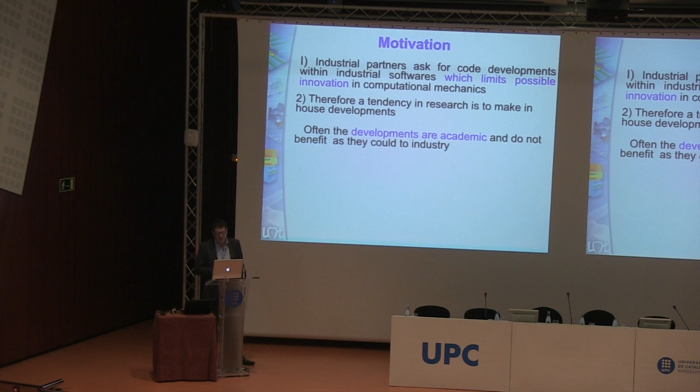So industrial partners often ask us to do code developments within their own softwares. And this limits a lot what is possible to do in computational mechanics for industry today. Not all industry, but let's say classical industry. Therefore, as we like to do research, we have a tendency to develop our own developments. But those developments, even if very interesting, are often academic. We cannot take into account the complexity of real industrial problems and so on. And so they do not benefit industry as they could.

Okay, so the non-intrusive paradigm aims at, in fact, combining the two worlds, aims at doing what we want to do within industrial models. Okay? So the goal is very simple. The goal is to be able, where you need, to substitute a model of a part of an industrial part with the model you think is much better and with the technique you think is much better to solve this model.

Okay, so the idea is to couple a general model with all the technical complexity with, where needed, a local model you think is much better than the other one, with the computational technique that you like, and so on. And the tool, basically, today is quite easy. It's thanks to Python scripts. The price to pay is that the method is iterative.

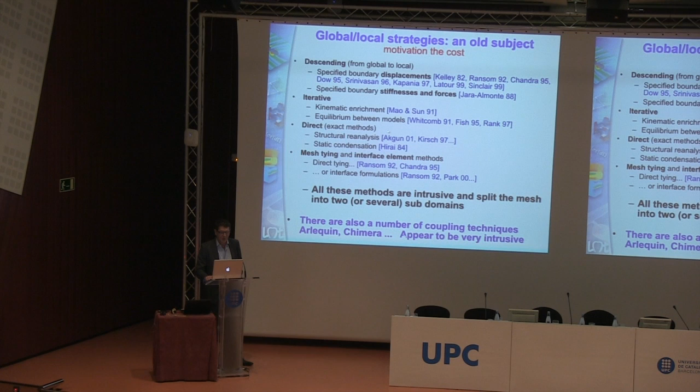So, in fact, as I said, it is an old subject. It comes from what in the past was called local global strategies. So there are a bunch of works which have been interesting in that area. But in fact, what we try to do here is to do global local strategies in an extended way and in a non-intrusive way. So this is something which starts to gain interest in research. The vocabulary comes from stochastic approaches, because to put a stochastic model within a classical code is difficult. So people have tried to do stochastic computation outside of the code. Okay, so that is why I use this vocabulary.

And within those methods, you have local global approaches from Whitcomb, the first, I think, which is weakly intrusive. You have the same goal in the Arlequin framework, but it's strongly intrusive. And today, what I call the method is substitution. You substitute a part of something with another part. Okay, and there are works going on in a variety of domains. I will mention that, besides what I call substitution, there is very interesting work done by Duarte and other people in fluids and in solids with non-intrusive versions of partition of unity methods.

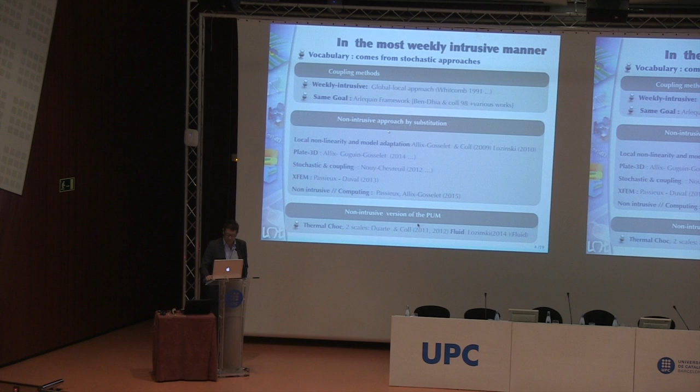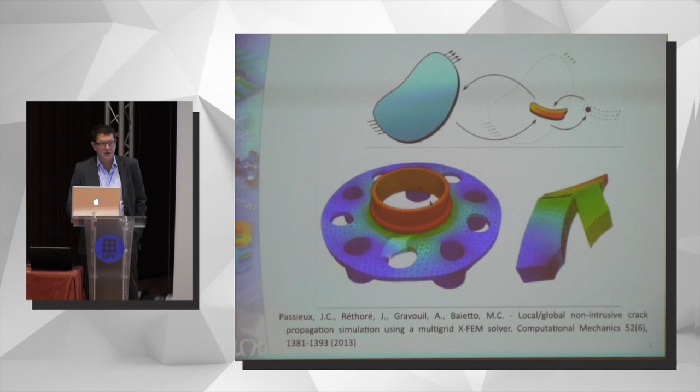Okay, just to see what you can do, it's a very nice work from Passieux in Toulouse. In fact, he has an industrial code where XFEM was not implemented, but the guy wanted to test XFEM. So they had an XFEM solver. So like this, you can substitute this part with this part. And really, what I call non-intrusive is that this thing has been done in an industrial software, and we never touch it. We don't touch the model, we don't touch the mesh, we don't touch anything. We want to replace this by this, doing natural computation on the industrial model. Okay, that is the goal.

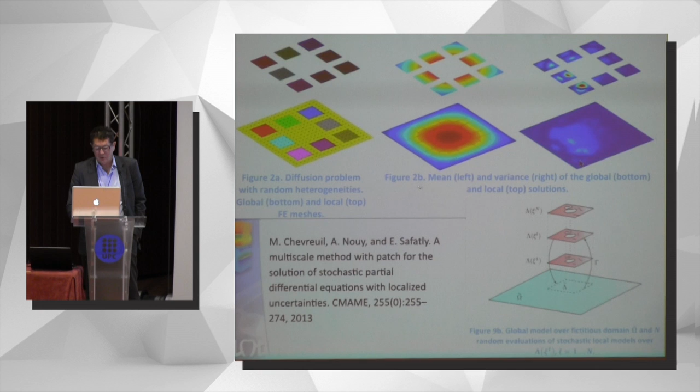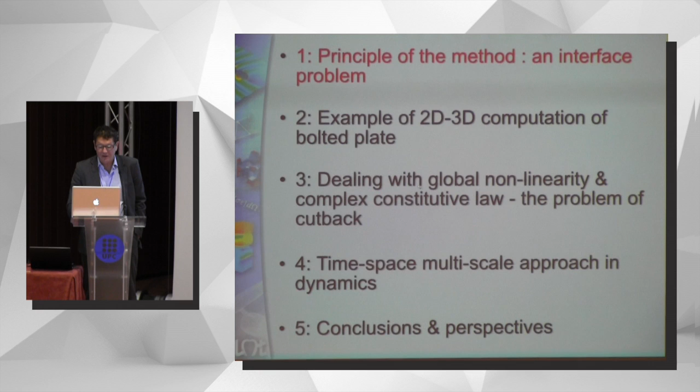So another type of work today is for people who are doing stochastics. In fact, usually you have uncertainty locally, so you can use your favorite global model, and you substitute locally and solve locally the stochastic problem. This is the work done, for example, at Nantes by Nouy and others. So, just to give a flavor of the method, it's very simple. It is an interface problem. So let's take this simple example here.

This is my reference model. It can be nonlinear. You have holes. You can have detail. It is a sketch. Okay. And this is my initial model. It is a linear one, for example. And I have a crude description of the local zone, both on model and on topology.

Okay. So what I want to use is only two models. This model and this model, because this is the local one, and if I want, I can use an iterative solver. I can use what I want to solve this problem. Okay. So the question: how I compute the reference problem thanks to those two problems.

In fact, this one I will call it exact. This one I will call it global. This one I will call it fine. And for technical reason, I will need what I call approximate. That is this area, this model, the crude model of the local zone. Okay, so it's a very simple problem.

In fact, we see that in order to get the correct solution, we should find additional interface forces to compensate for the differences between the crude approximation of the local model and the correct one. So abstractly, we have to find these forces which take into account the differences of the two models, and will give the same displacement at the interface as the reference model and the same reaction forces. So very, very simple model.

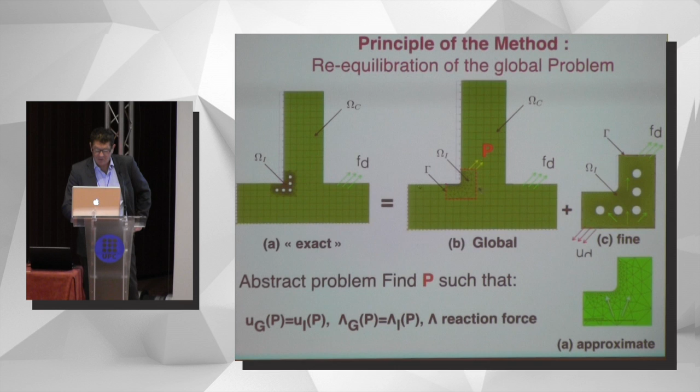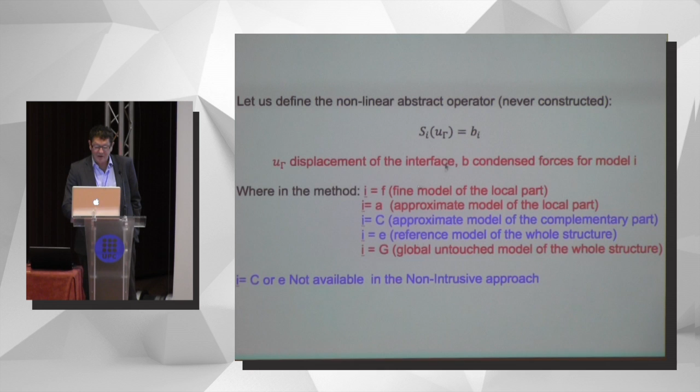Just to give a word, what is this operator? In fact, in the classical linear sense, it is only the condensation of the problem on the interface. Okay, so it's very classical. So you do a classical condensation. Here we do not do that, of course, because the operators are nonlinear. But it is classical.

So from condensation, we know, for example, this is very important, that the exact Schur complement is the sum of the fine plus the complementary part, and that the condensed forces can be seen as a contribution of the fine part and contribution of the complementary part. And these are general properties, true even in nonlinear cases.

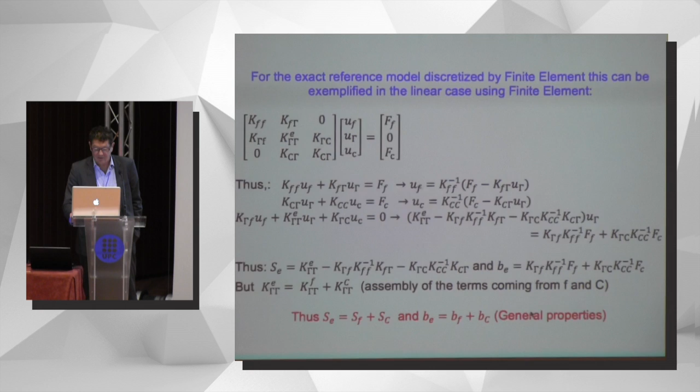Okay? So if I replace this guy in this solution, I end up with this equation. P is the solution of this abstract problem: F of P is equal to 0. So in the algorithm, we'll do a fixed point algorithm. So P solution of F of P equals 0 means that P is a fixed point of these operators.

What are these operators? This operator is identity minus the Schur complement of the exact problem and the inverse Schur complement of the global one. Due to the properties that I said, it is the difference between the global and the exact, which means the difference between the approximate modeling of the local zone and the exact one.

Okay. And due to a classical property of contractive operators, if you have this operator, which is larger in the sense of operators than this one, you converge. Otherwise, you compensate by a relaxation to ensure convergence. So convergence is really not difficult to prove when convergence exists.

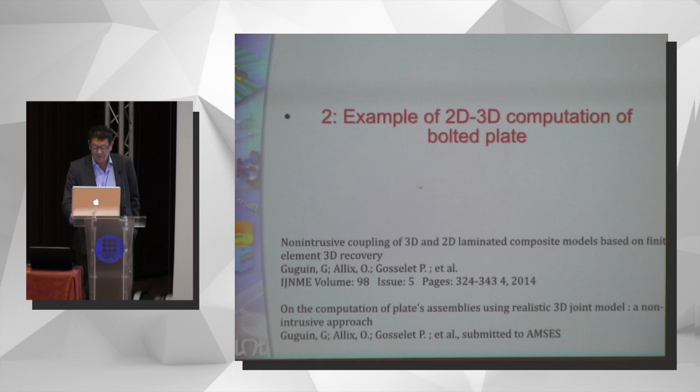Okay, so a very simple iterative algorithm. We compute the global model, we compute the reaction forces, we add this as a new force, and so on, and it converges. Okay, so now some developments. Of course, we can improve the rate of convergence, but the principle is here. So some developments. We have tried to use this scheme. I should give maybe something to solve that type of problem. I will come back to it. So in fact, it is just a scheme.

You know, in industry they usually deal with plate and shell models. But then you have local parts like joints, multiple joints, and so on. And in fact, the joint models in plate models are very crude. So we would like locally to be able to introduce a 3D model of the joint with all the non-linear complexity. Okay, I will come back to it now. So the idea of what we have done is to do the same thing in 2D that we do in 3D. That is, we start from a 2D computation. We associate a 3D solution from the plate solution. We'll see how we do that.

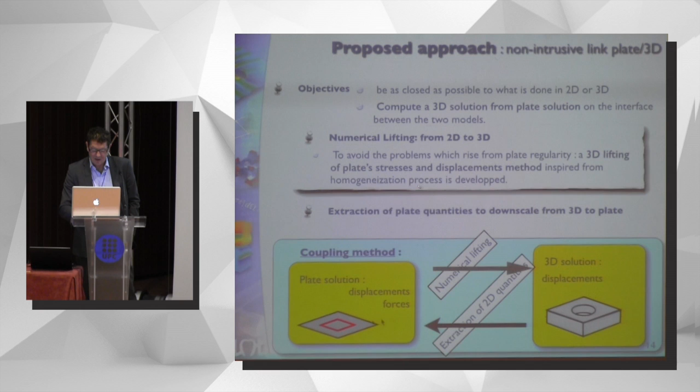So we will try to match only the 3D solution associated to the plate solution with the 3D one of the bolt. Okay. So, in fact, we start from the plate solution, we have displacement and forces, we go from here to the 3D solution, we get the displacement, and we compute now the extraction of the 2D forces, and we compute the residual in the 2D sense.

So how do we compute this numerical lifting of the 2D solution? In fact, we use a kind of homogenization scheme. That is, we solve a small problem for a composite part, for example. We suppose that the plate works in a linear manner. So we decompose the problem into 8 basic problems for the Reissner-Mindlin plates. And due to those 8 basic problems, we compute the stresses and displacement.

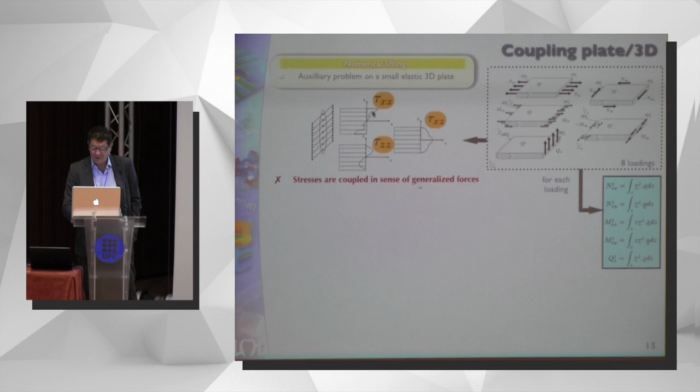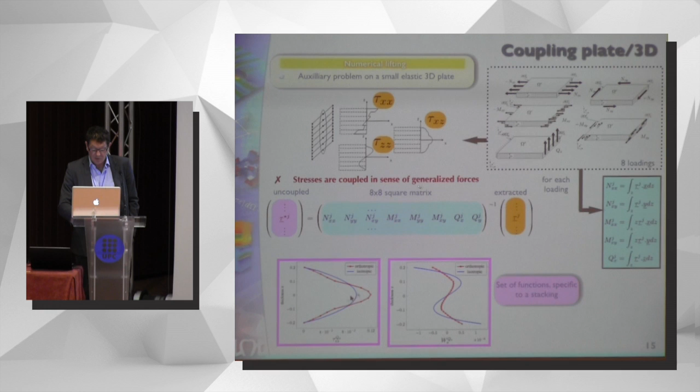And then, for any type of plate loading, we recover the distribution of displacement and the distribution of forces through the thickness, thanks to 8 simple problems. These are pre-computed, and we use them afterwards to lift the 2D solution and to couple the 2D solution to the 3D in the 3D sense.

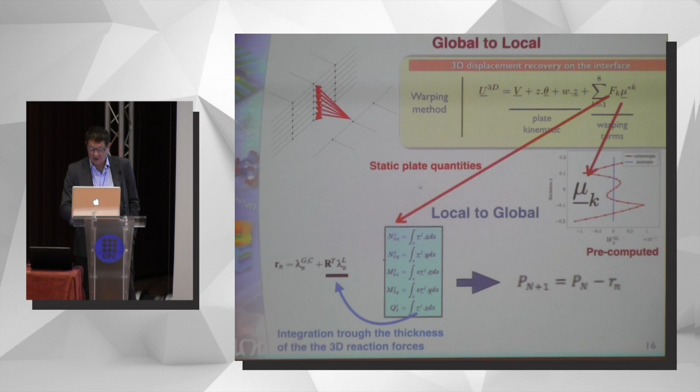Okay, so how is it done? We say that our displacement in 3D will be the plate one plus this warping term multiplied by the corresponding force in the plate solution. This gives us the distribution of the displacement in 3D associated to the plate one. Then, when we have done that, we send it to the local model. We compute the residual force, like before, which is the difference of the 2D one plus the condensation of the 3D reaction forces in the plate sense. This gives us our new forces, and so on.

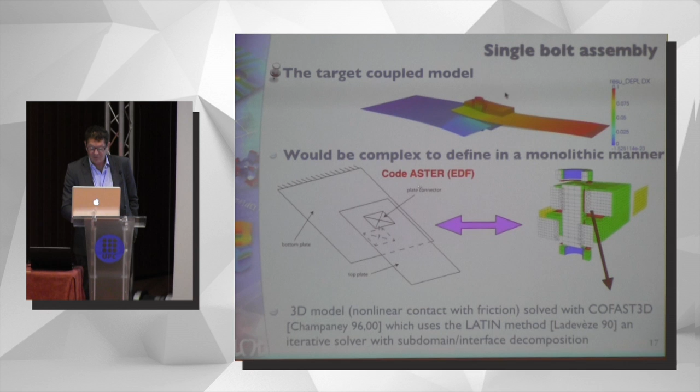So here, what is the interest? So I start with a plate solution. Here I have a very crude model of the junction. But the junction is quite complex. You have a screw, it is bolted, you have friction everywhere. So here you would like to use your favorite software. So in Cachan we have developed a software specialized for that type of thing. That is a screw, taking into account the prestress in the screw, all the surfaces and so on. Okay. So I will compute this problem thanks to this problem which is done in an industrial code, and this one.

Okay. So here it is interesting to see what happens. How does the fine model of the screw play a role? Here you see the plate solution associated to the initial one and the correction in the linear regime. So you see very little correction at the beginning. But then, as soon as you become nonlinear in the screw, here there is an unscrewing of the bolt. You see that there are big differences, even in the global solution, between the plate solution outside of the screw and the one. Okay.

So also this method is interesting because if you stop at the first iteration, in a way, it is what people do in industry, which is what they call the submodeling approach. So we can also check the submodeling approach. For example, the first here is the sliding at this point B here, between the plates, and the sliding within the screw at point A.

Here you see that for the first descent, here we get quite a correct value of the sliding far from the screw, but a very wrong one close to the screw. Okay, so it depends on what phenomena you want to look at. So submodeling is not good if you go, let's say, far in sliding within the screw.

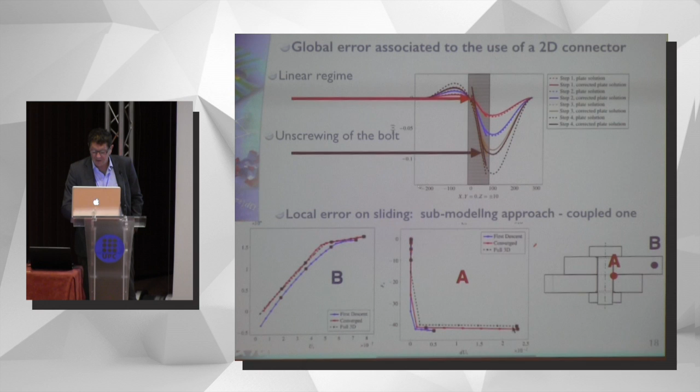And here, this is a full 3D computation. This is the solution obtained for the things. Here, you see that this is a full 3D solution. We were able to perform it. This is a converged solution. This is a non-corrected solution. You see that within the screw, that is a submodeling approach. Within the screw, the submodeling approach is fully wrong. And you can see also, here it's more difficult, that in fact the sliding, the unscrewing of the bolt is not predicted with a submodeling approach.

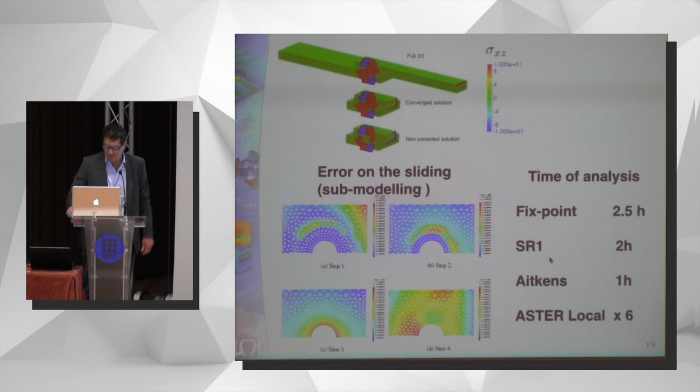So the time of analysis, those problems are complex. You have unscrewing, you have things and so on. So if I take the fixed point, it is 2 hours and a half, let's say it's our reference, we can use acceleration techniques. And the best one is Aitken's. It's very simple, it's non-intrusive, and it works very well. And so in fact, for all this method, if we do the same thing, computing the screw with Aster, it is 6 times. So why? Because we develop a special software which is more for the computation of the joint, which is much more efficient than classical software.

So now what are we dealing with? We're dealing with not one bolt, because it's not interesting, but a series of bolts. And in fact, in that case, the non-intrusive technique can be seen as a preconditioner. The plate solution can be seen as the preconditioner of the 3D ones. And then what is the interest? That for this bolt and this bolt, I can use always the same software, which has been developed only for one bolt, and use it in parallel due to these techniques. So at the moment, we are computing hundreds of bolts with the same software in parallel, using the plate solution in that case as a preconditioner.

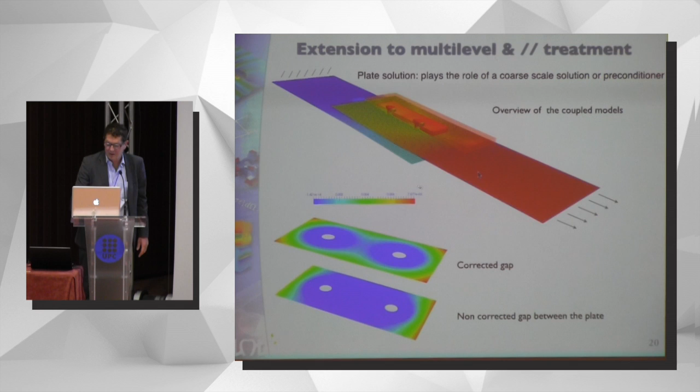Okay? So just to see that not everything is that simple, I'm working at the moment with Safran. Oh, sorry, I should have recognized my co-author, but I was so impressed by the talk that I was perturbed. Sorry.

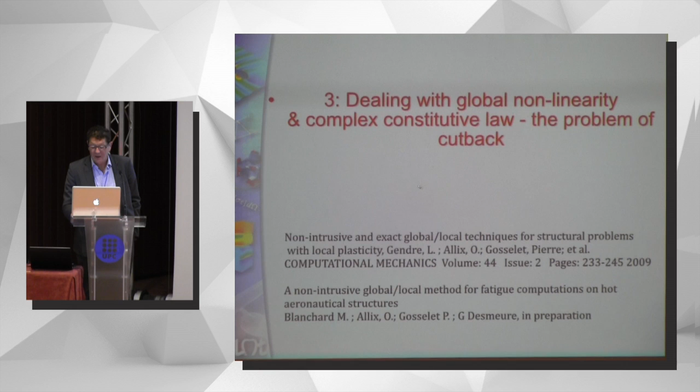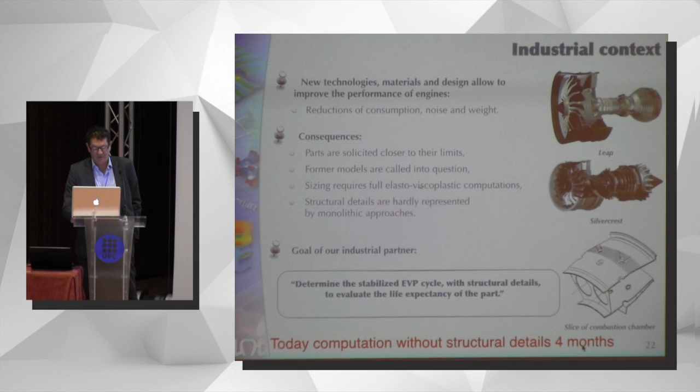So now we are dealing with this kind of thing, that is really complex constitutive law and non-linearity. And so things are not that simple. In fact, what people want to do with Safran, they want really to be able to compute their structure with all the details, because they are at the limit. And today, the part that they are computing, without the details that they want to take into account, is 4 months.

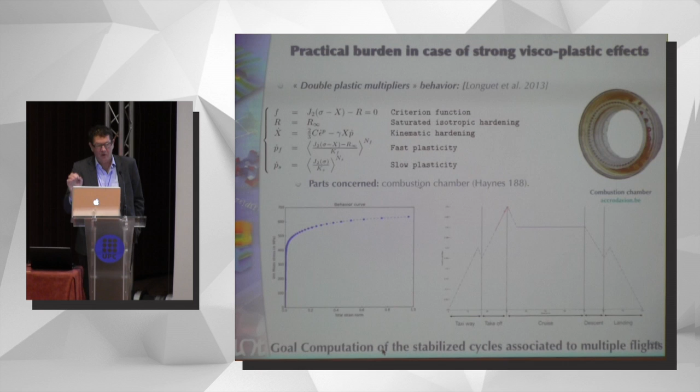Okay, what is this type of problem? We have, for example, combustion chambers. We have complex constitutive behaviors. It is viscoplastic behaviors. You have temperature and so on. And the goal is to compute, not for this part, but for another part I will show later, the stabilized cycling associated to multiple flights. So you have a very complex set of loadings. Okay. And today, to do that for a part, it takes them 4 months, but without introducing structural details.

Okay. So when we have tried our methods, in that case, I will show a simple example, we have had a lot of problems. Because in fact, you see, the global model is nonlinear, viscoplastic. The local model is nonlinear. And the detailed local model, you have holes, you have details. And so you use Abaqus. We use Abaqus. And in Abaqus, to converge, you put cutbacks. So you don't know it. You give a certain time. And Abaqus will do several cutbacks in order to converge.

But in fact, in the different models, the cutbacks are not the same. So at the end, with the non-intrusive method that I presented, you converge, but you do not converge to the correct solution, to the reference solution. For example, here we had on the maximum stress an error of 20 megapascal, and the goal of the industrial would be not more than 1 megapascal of error. Okay.

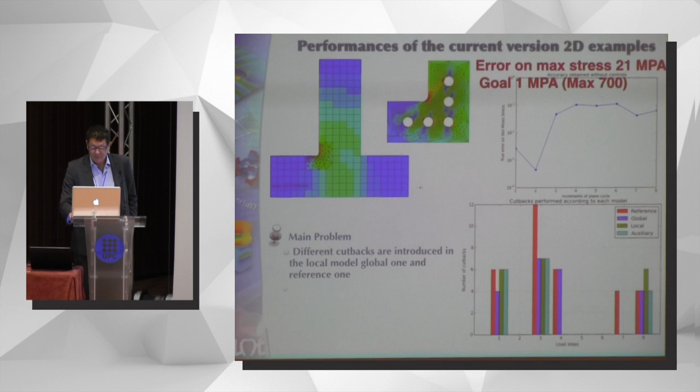So what we do, in fact, oh, sorry. Yes. So, I'm sorry. Oops, what happens? One step before. Yes.

Okay. So what we do, in fact, is that we start with a global model. The global model in Abaqus, you have to look at the cutback. For example, let's say I want to go to this step on the global model in this step. Abaqus will divide, depending on the problem of convergence of the local model, will divide the step in those steps. Okay. Then we have to recompute the global model taking these steps into account in order then to make the non-intrusive approach locally between the time steps imposed by Abaqus.

And what is nice is that we can solve the local problem. We have to match this time step. We can solve the local problem if needed, introducing other cutbacks, but then the method converges. It is a practical problem.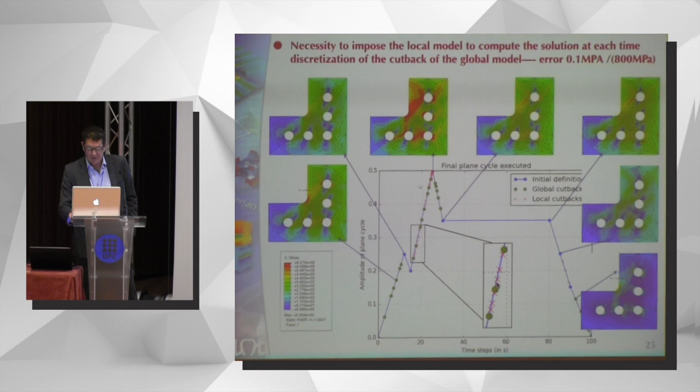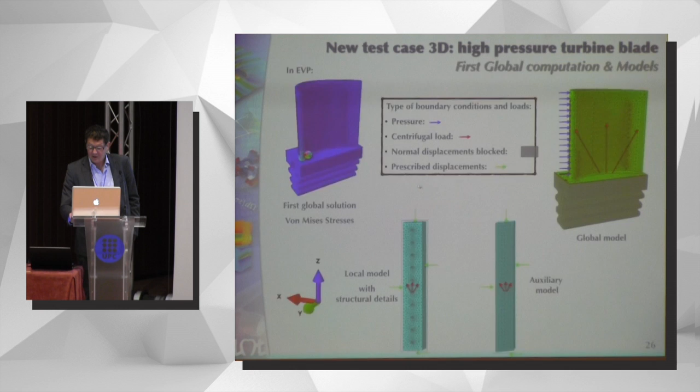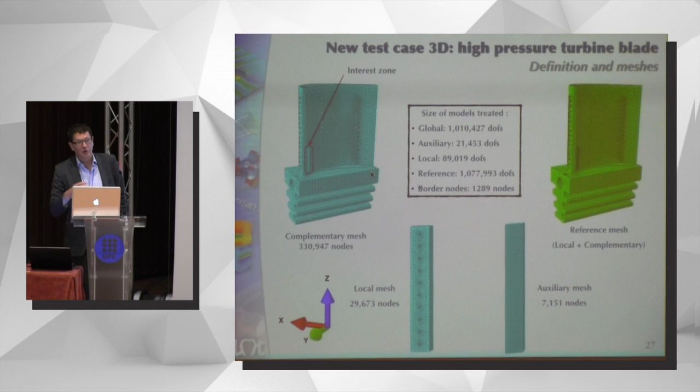So just an example. This is a global problem. Here you will see that there could be a lot of heat. So people want to introduce holes in order to cool down the process. So we have an auxiliary model. We want to see, if we introduce the holes in this part, what happens. Okay, so here the model now is something like, oh, it's boring, sorry. The global model is 1 million degrees of freedom. The auxiliary one is this number of degrees of freedom. It is fully viscoplastic and so on.

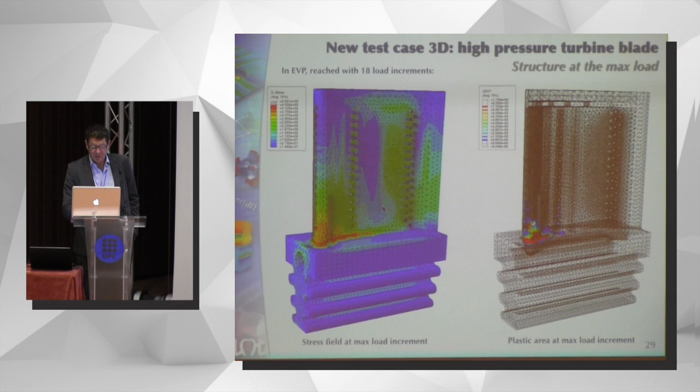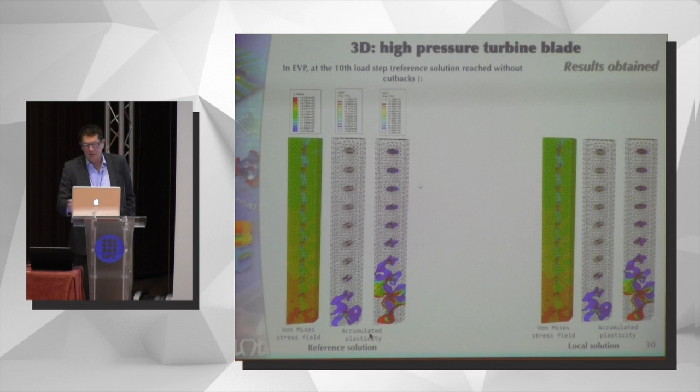And so, with the method now, with the method of cutback, we are able to predict precisely what is the distribution of the plastic strain around the hole due to the local detail with a precision of less than 1%. So now the method works in an industrial context, let's say.

How much time do I have? 5 minutes.

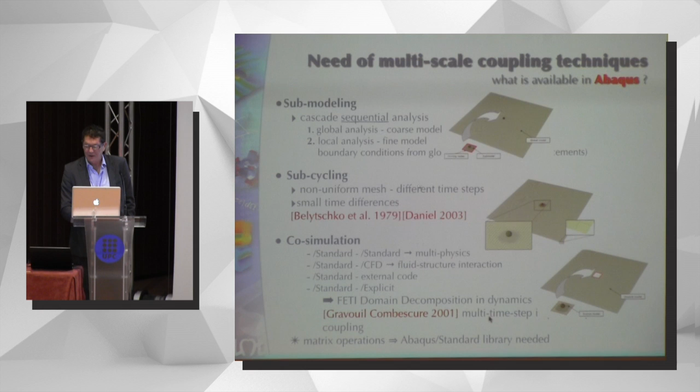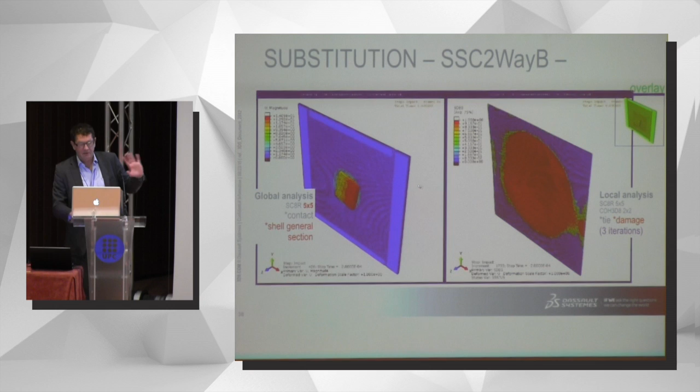So, I just want to say that now I'm working with Umberto Perego to extend the method in dynamics, in explicit dynamics. I have no time to give details in order to keep time for questions, but let's say that this has been done, and that today the method has been introduced in Abaqus Explicit. So, what is nice is that you are able to use this type of model. You have a plate model, you have a 3D model to take into account delamination. So the plate model, it is in explicit. So you have the critical time step of the plate model.

Okay. Then you have a local model with delamination, very fine 3D. Then you have another time step, and the things are coupled, and you converge to a reference solution, which is, in dynamic explicit, the model of the plate plus the local model of your composite plates, and you are able to compute it in, we would say, a multi-scale space and time manner.

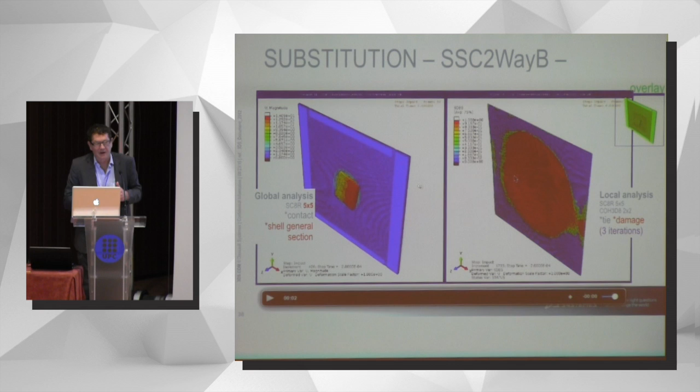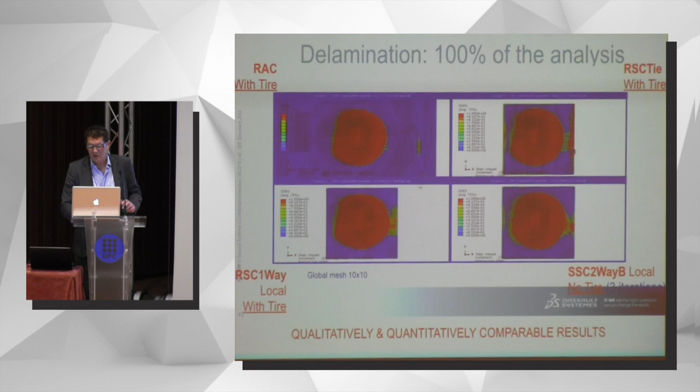Okay. So this is a comparison with the reference model. This is a substitution. This is a reference model. You see here the extension of delamination. Here it is not the reference model, it is what they used previously. It is a tie model. So they tie the local model with the 3D one, and you see that you have a lot of spurious delamination. We have a little bit in our model, but less, and the method is non-intrusive.

So I will try to conclude. Sorry, I've been maybe a little bit long. So I think that non-intrusive computational approaches have broad capability to easily couple software. My initial interest was to use the software I was developing for composites and to use it within an industrial context, which was not possible.

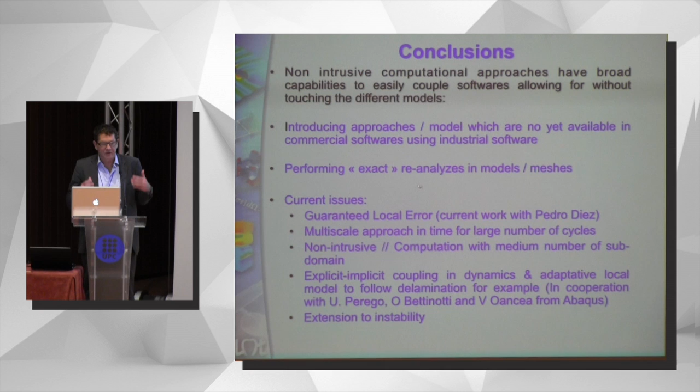But in fact, today the demand of industry, it is amazing, is to be able to do reanalysis of their own problems. Because, in fact, it's so complex to make meshes. For some meshes, they are at the limit. So if they go to a higher number of degrees of freedom, they are not able to compute the problem, and so on. So there are a lot of problems in industry where they are keen to use this type of method, and they ask us to develop the method in sometimes quite a crazy way. So we try to answer the problem. So in fact, this allows to perform exact reanalysis in models and meshes.

And so the current issue I'm working on with some colleagues is, you see, there is a question of precision, especially in viscoplasticity; high cycle fatigue is a very important one. So we have started to work on guaranteed local error bounds in non-intrusive approaches with Pedro Diez. For the moment, it's a linear setting. Of course, if we want to deal with a very large number of cycles, we have to imagine a multi-scale approach in time. So this is the current work.

We work, as I said, to use those non-intrusive approaches to introduce parallel computing in industrial software. I think it's a very simple and nice way to introduce parallel computing in industrial software. We are extending the implicit coupling to explicit-implicit. And something which is quite open, in my opinion, at least from the theoretical point of view, is extension to instability.